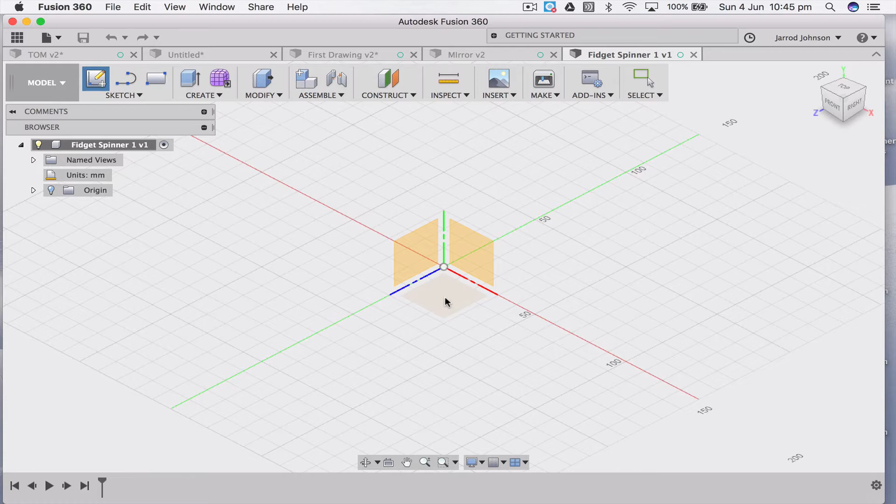Once again, we're going to create a sketch on the bottom plane. And what we want to do is create our circle. First we need a circle, so you can just use C, and we're going to create it like that. Well, let's put it like that.

Now, the problem is that the bearings we use are 22 millimeters. They're standard skateboarding bearings, which we've bought in. So if we put 22 millimeters, zoom in a bit. Oh, 22 millimeters.

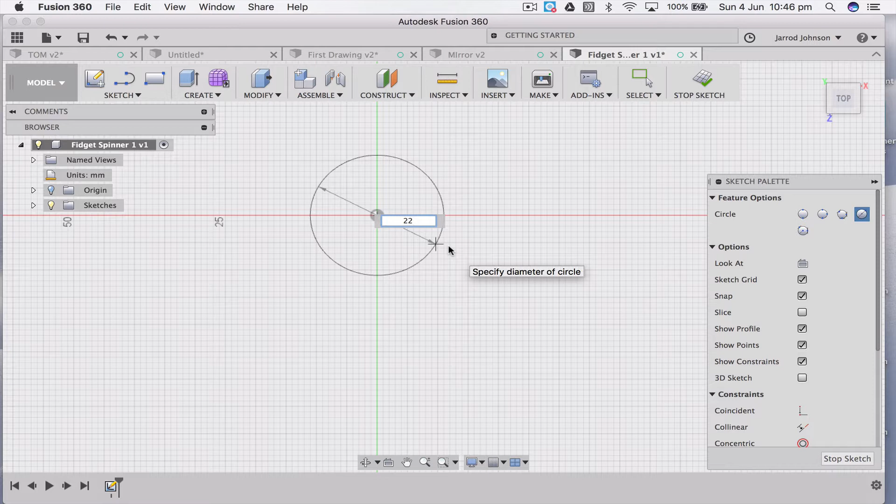If we create something that's 22 millimeters and try to fit something else that's 22 millimeters inside that hole, it's not going to fit because there's no tolerance. So we have to add a little bit, 0.1 or 0.2. I'm not sure what's going to work on our 3D printers, but let's say 22.1, because if it's still a little bit tight, we can always sand it back a bit because it's made of plastic.

Right, so there is our initial first hole. Now that's going to be where the ball bearing goes in. So now we need to make the outside.

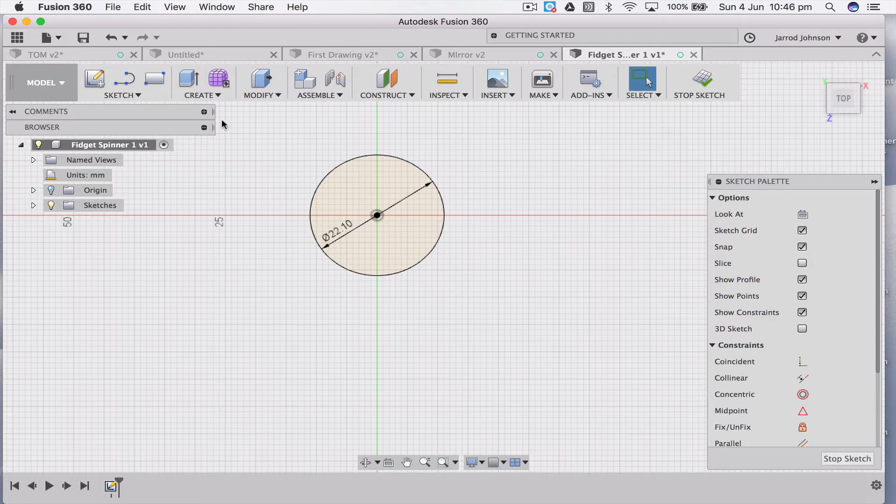So remember, we need to go to offset, or concentric in this case. Let's try this, click on this. Oh, don't want that, no, we just want to go offset. So here, O for offset. And you can see it's giving us the option to make it bigger or smaller. We want to go bigger.

And let's say we make it, I don't know, 1 millimeter bigger. Okay. Right, you can see here how we've offset that one from that.

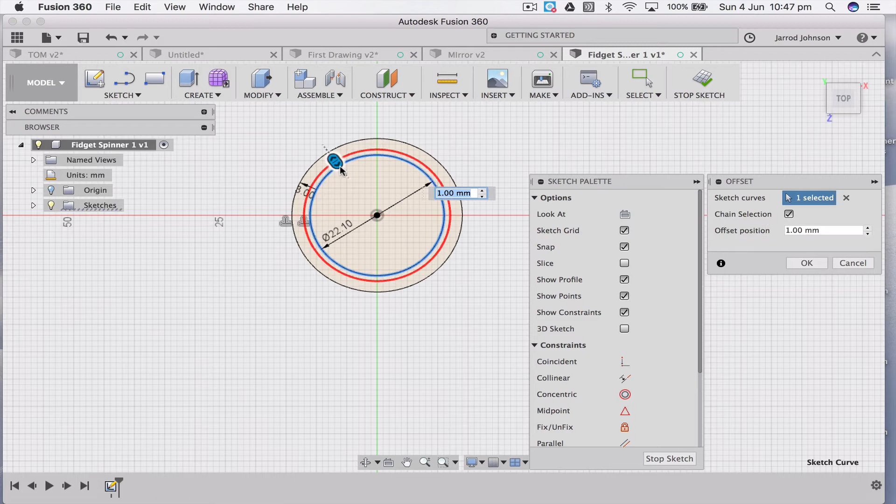Now we're also going to make some stuff that goes around the outside, whatever you want to do. So the bit that goes around the outside, we're going to make another ring from that. So we're going to offset, oops, this one, unfortunately, hang on, I'll just show you, you cannot offset the outside one because the outside is already offset.

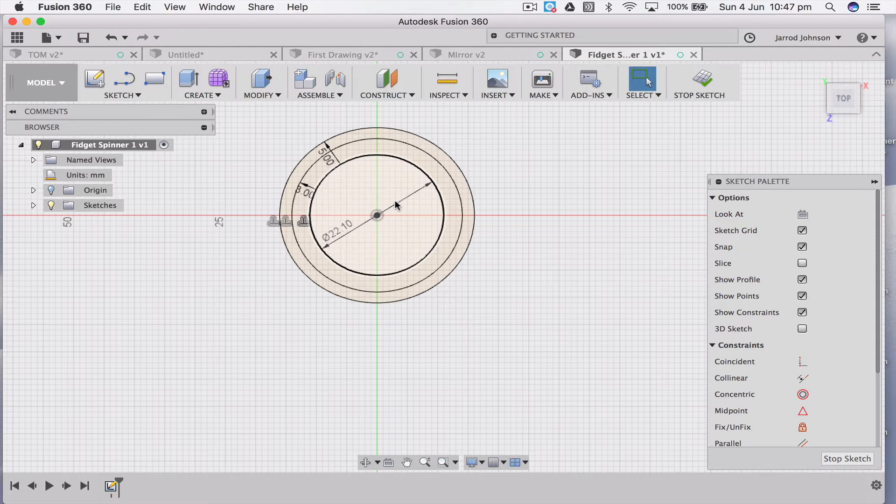Right, so, well, seems to be working. Well, let's do it anyway. We're going to go back to the original, and we're going to make this 5 millimeters. Okay, now this is going to represent the hole, this is going to represent the ring, and this is going to represent whatever our design is around the outside.

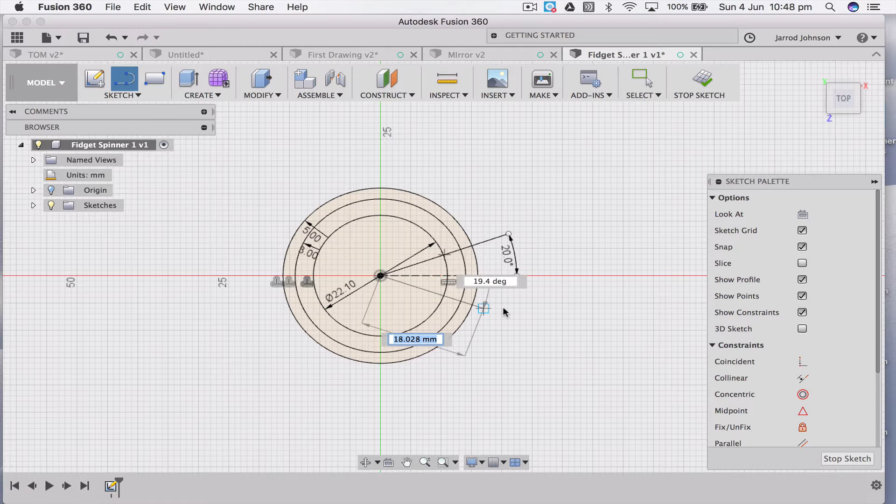Doesn't actually matter how far that is, but it does matter how many degrees, so let's go 20 degrees. Okay, so there we have it. And we're going to do another line tool going out 20 degrees the other way. So I've hit tab and written 20 degrees. But just for fun, let's go 15.

Now that's not right because we want them to be balanced. So remember how we did mirror? We're going to do something a bit like that. I'm going to go down here. Instead of mirror, we're going to go symmetry. So click on this, we click on this line here, and we click on here.

And I've done it wrong, sorry. No, wrong way. Right, so symmetry again. We go here, here, here. Weird, I don't know why it's done that. Okay, let's try it this way.

Okay, I think the problem is because I'd had it set to here, and there we go. Alright, so because I'd put it 20 degrees, it couldn't force it because one was constrained to be 20 degrees and 15 degrees, and one was trying to be symmetrical.

Can't do it. So now, if I grab one of these, I can move them in or out. Right, that's going to be our little tool there. Now, this one is a construction line, so that's okay. What we're going to do is, that's interesting.

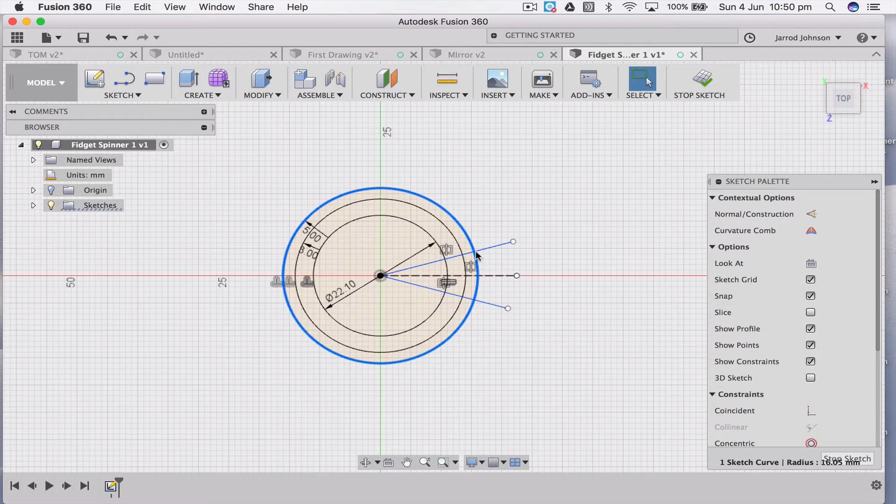Interesting. Okay, so we've got our lines. Now I've clicked off it. So you can see now I've got a ring here which is not going all the way around. So I actually want to delete this part to make it back to the ring.

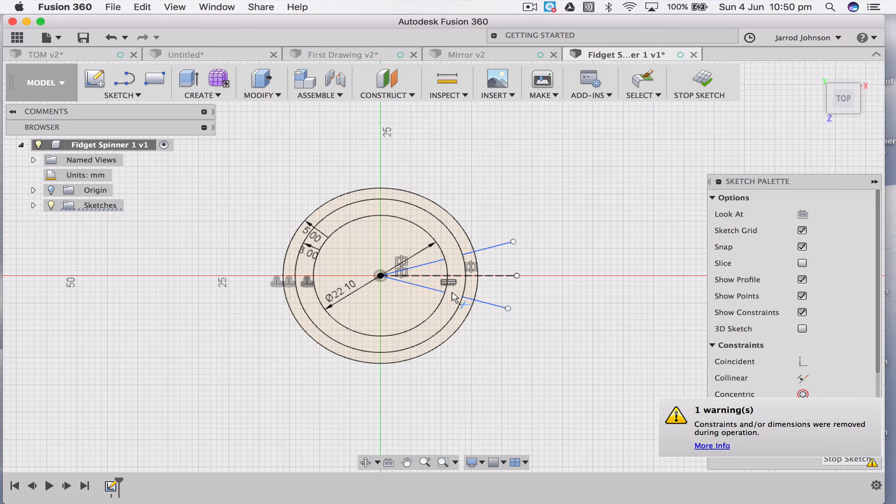So I can go up here to sketch and trim, or just press T. I want to trim this and trim this one. Right, I don't need that one or that one. Okay, and I don't need this one or this one, and I don't need this bit around the outside. Oh, that's not good. Oh, undo, too far. Okay.

So now, oh, I see, it's just delete dimensions. Now this I can move in or out if I want, and it will still keep the same thing. These ones I should still be able to, because it deleted that. Okay, let's fix that again. Because it deleted the point out here, give me something bigger to grab.

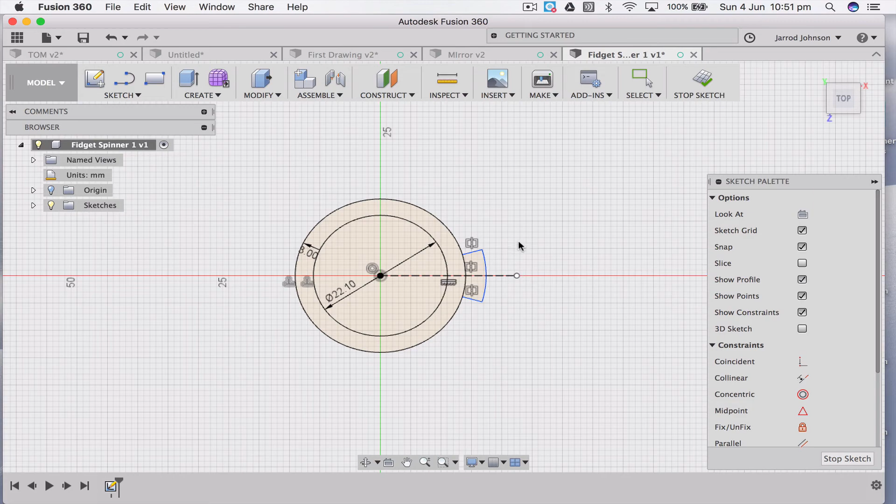Okay, so what I want to do is I want to redo the symmetry. So that one, and that one. There we go. Because it deleted the point out here, it lost its symmetrical pattern. Okay, so I'm going to stop the sketch now. Okay, and I have the startings of my ring spinner.

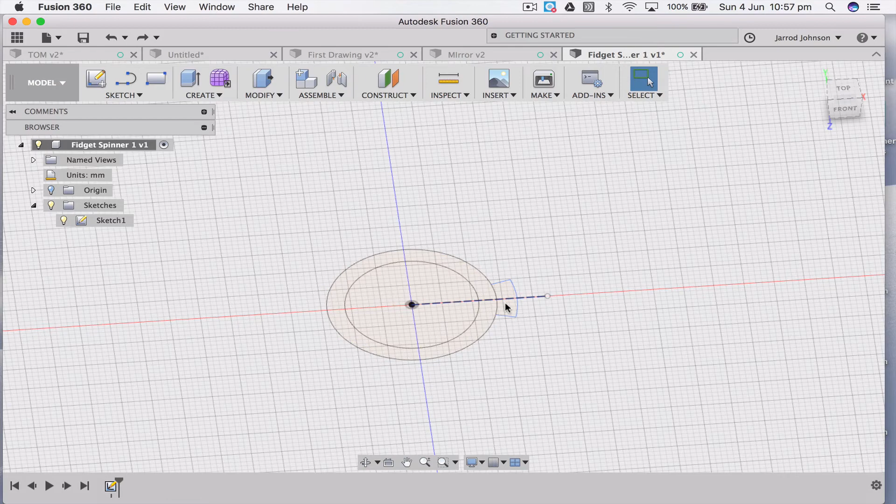Okay, so next thing I want to do is I want to extrude this up. Now the rings, oops, I'm still on the trim. Okay, so we've drawn it now. Drawn our ring with our little extra piece on the end, which we're going to build around. So next thing we want to do is push pull or extrude. Now you can see over here there's actually a couple of different options.

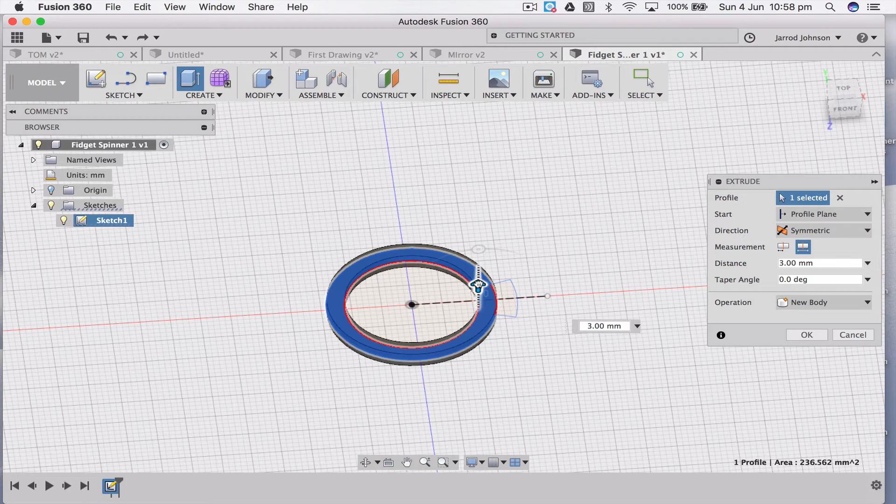Because we want to extrude up and down at the same time, I'm going to go symmetrical, and we want the whole thing to be 7mm. So if I pull this up, you can see it's going up and down at the same time, but we want it to be 7mm.

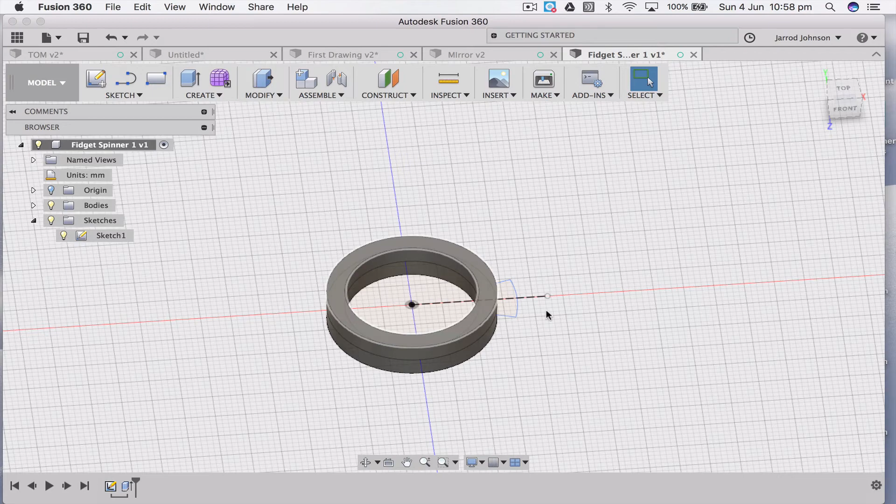Right. Now, one of the big problems I have here is I can't find that piece that's here, and the reason is if I go over here, I need to turn it back on. So turn the light off, turn the light on, to get it back on. Now we want to extrude this one as well, so extrude in the same way, so symmetrical, total of 7mm. Okay, except when I do this, sorry, 7mm.

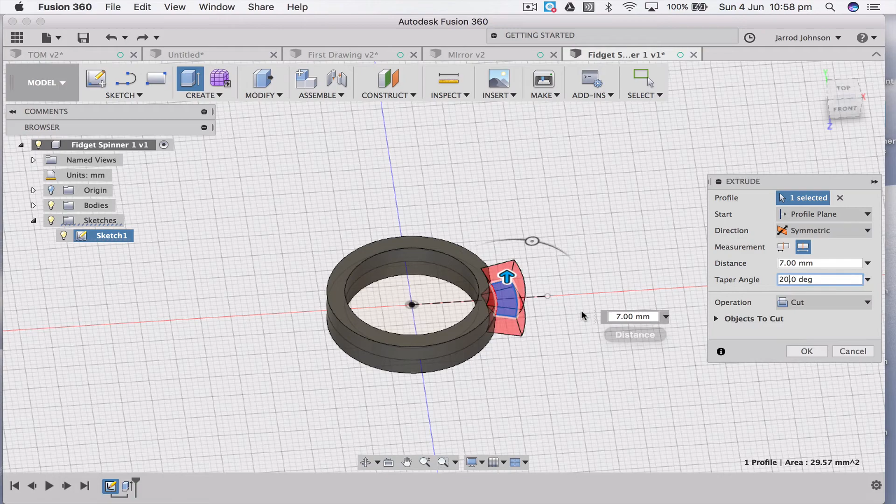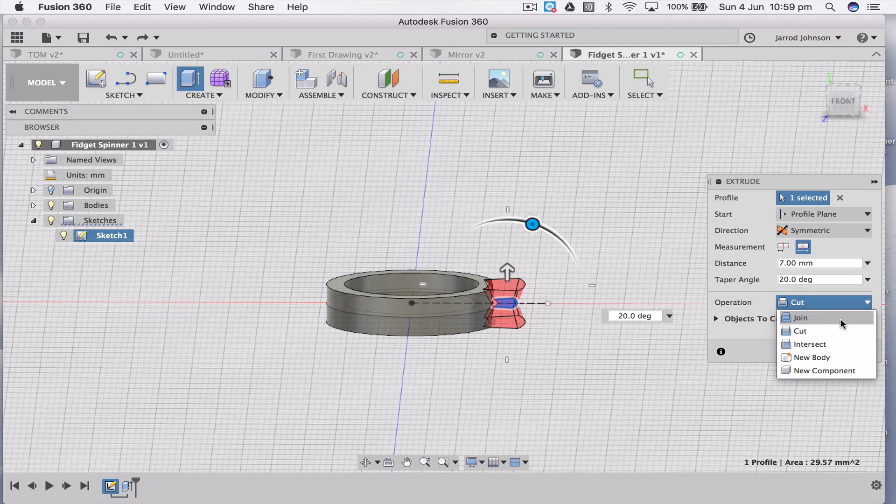Right, the other thing we want to do is change this to be 20 degrees. And what you can see is we can actually make different shapes around the edge. So I can extrude it more or less. There's 90, right? Let's say 20 degrees. And the last thing is, you can see what this is doing is cutting into it. We don't want to cut into it, we want to join it together. So you can see our shape here. Alright, and then go OK.

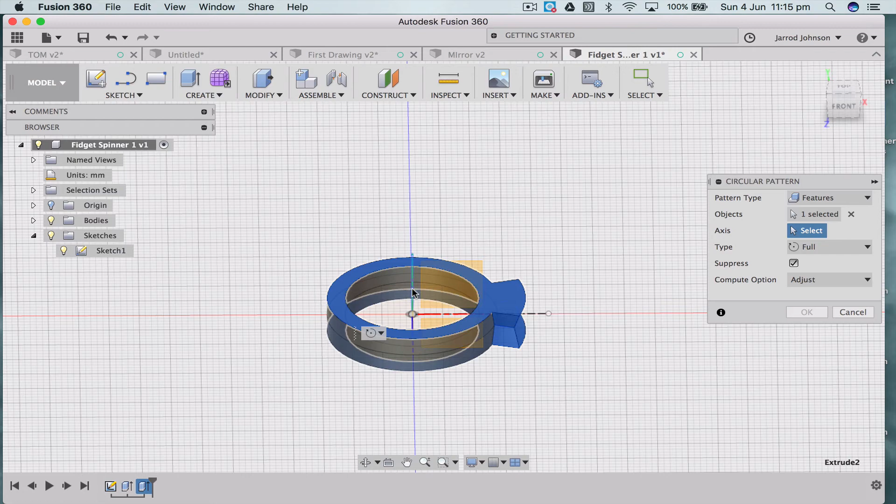Okay, so I've created our extrusion here and then this one. But now what I want to do is repeat this pattern all the way around. So I've clicked on it down here, and I've gone create a pattern, and I'm going to create a circular pattern. So I've selected this, and I now have to select an axis I want to spin around, which I'll do the vertical one. And now if I turn around, you can actually see some ghost images around here, and I can adjust here or adjust here.

Let's go for 6. All right, so it's a cog with 6 pieces. And let's have a look at that. So you can see now I don't actually like this going quite like this, so I really want to push these out. So I can modify that with a chamfer, where you're cutting the piece off. I'm going to go in, say 2, 3 mil. Yeah, okay. How's that look? Right, so there's our bits that are going to lock into place. But now I'm going to have to go around and do them for all these different pieces.

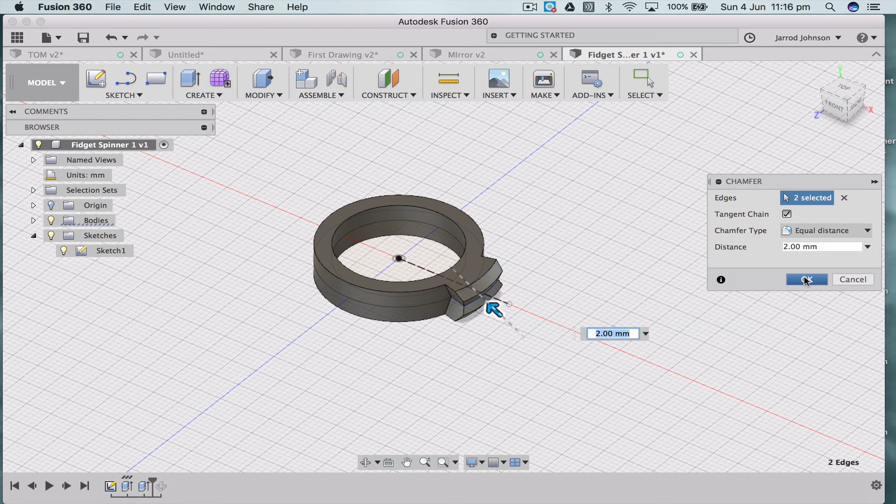So instead of doing that, what we can do is down here where we've got a sketch, extrude the first piece, extrude the second piece, multiply. If we go back to here before we multiplied it, and now we chamfer it off here, so let's go into here and let's push this in. 2 millimeters, that will do. Alright, go OK. And then go forward again. And you can see that it hasn't been replicated.

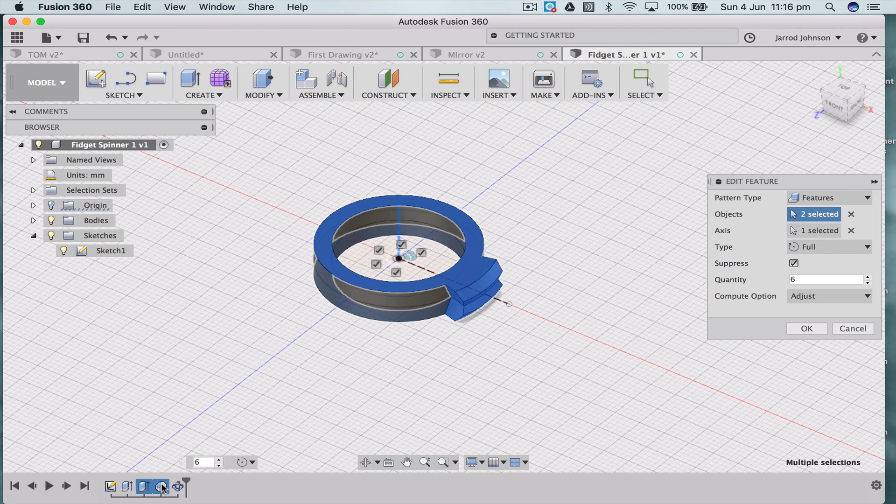Right, so if I click on this, I can either right click edit, or double click. There we go, double click. And if I go one selected, it says that this has been copied, but this has not been copied. So what I'm going to have to do is press Command and click, or Control and click, for it to now be copied, and hit OK, and now the change has been made to all different pieces. So now I have my cog that I've designed.

Theoretically you could have a number of these other cogs next to it, or you could have many different pieces going around. Basically, that is our first ring spinner. So if you went and grabbed your skateboard ball bearing and put it inside here, or printed it first and then put it inside it, then you would have basically a six pin ring spinner. Alright, so that's the first start of making our first ring spinner.